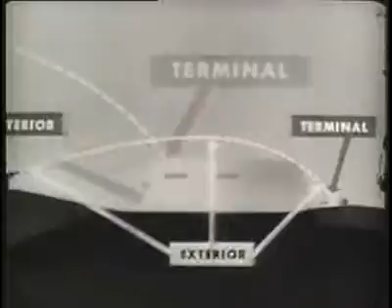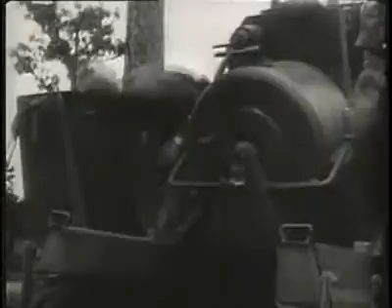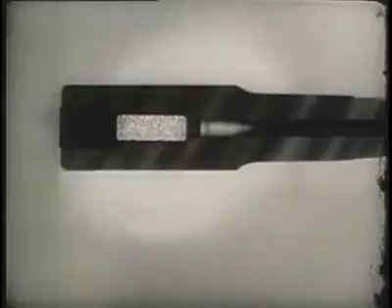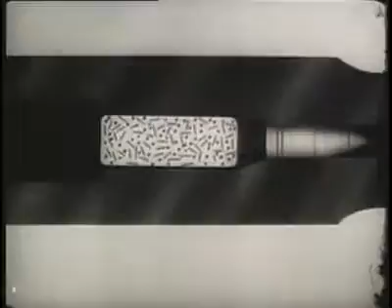Let's look first at the problems involved in launching our ammunition with launching devices that are complex, precision-made instruments, but which operate on a principle as simple as that employed in a pea shooter. When the pressure behind the projectile becomes strong enough, the projectile will move. In any gun, howitzer, mortar, or small arms weapon, the pressure behind the projectile is caused by the burning of the propelling charge or propellant, which forms a tremendous amount of gas in the chamber.

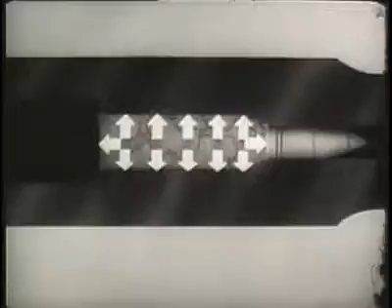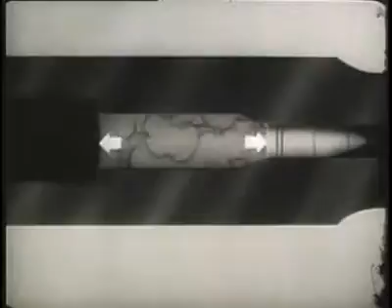This pressure is measured in thousands of pounds per square inch and is exerted equally on all surrounding surfaces, but with different results. The forces represented by the vertical arrows have no effect on the projectile. The pressure or force to the right is against the projectile, the most readily movable of the surrounding surfaces, and sends it out of the bore. At the same time, the force to the left is against the gun, which moves in recoil.

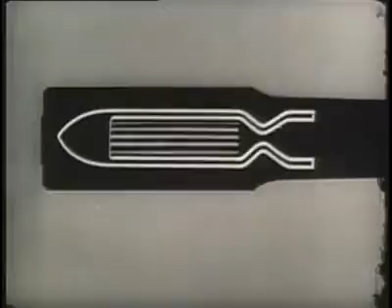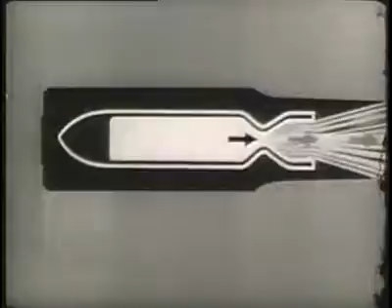By making a few changes in our simplified gun, we can see what happens when we launch a rocket. In effect, the lightweight rocket replaces the gun, and the lightweight gas replaces the projectile. The pressure inside, being equal in all directions, forces the gas out of the chamber at an extremely high velocity. At the same time, the pressure exerts an equal force to the left to propel the rocket.

Military rockets operate on exactly the same principle as the 4th of July variety. The bazooka also uses the rocket principle, while the recoilless rifle is a combination gun and rocket. The propellant used in guns and most rockets is some form of nitrocellulose, commonly called powder. Modern powder is made in grains, the grains taking many different forms to get the various pressures needed in the many different modern weapons.

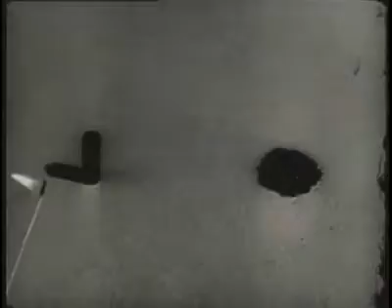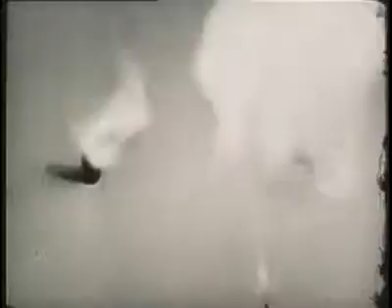Apart from chemical composition, grain size is the most important single factor in determining how rapidly a powder charge will burn. Just as wood shavings will burn more rapidly than the same weight of logs because there's more burning surface exposed, so will small grains burn more rapidly than a large grain of the same weight. When small, rapidly burning grains are used, the propelling effect is that of a sharp, sudden thrust. The effect we get from large grains is that of a sustained push.

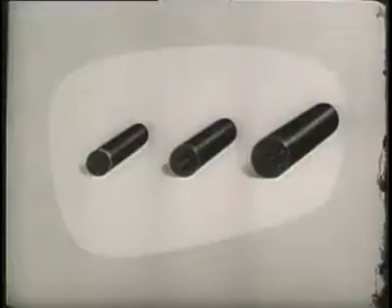But grain design also affects the rate of burning. In general, there are three types of grain: a large grain with 7 holes, a medium-sized grain with 1 hole, and a small solid grain called a digressive grain. When ignited inside a gun, it burns fast and the pressure rises rapidly. As the burning surface decreases, pressure is generated at a slower rate. Here's a graph to show pressure action during burning. The digressive grain produces a very high pressure quickly, but the movement of the projectile tends to let the pressure drop off rapidly.

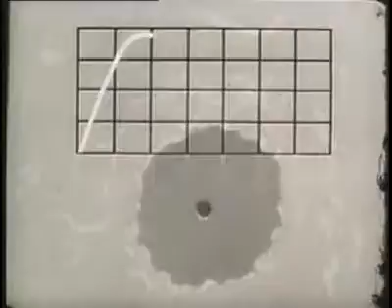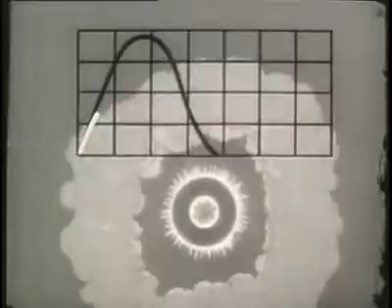The medium-sized grain with a single hole is called a neutral grain. In this form of grain, the burning is slower at first, but the burning surface remains constant during the burning period. Thus, the maximum pressure is not as high as with the digressive type, nor does the pressure drop off as sharply when the projectile moves.

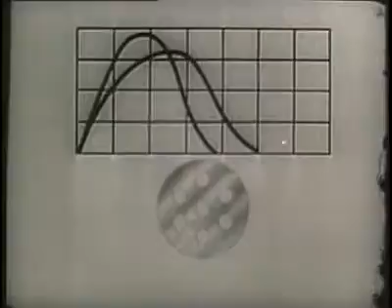The large grain with the 7 lengthwise holes is called a progressive grain. Here, the burning surface increases due to the number of holes. The pressure produced is not as high as with the others, but it falls off even less rapidly as the projectile moves. This grain is preferred in modern high-velocity weapons because it gives the projectile a steady push, produces higher muzzle velocities, and has a lower maximum pressure than is possible with other types of grains. There are many other grain designs, the fast-burning powder sheets for mortars, for example.

Neutral tube-shaped grains for certain types of rockets, as well as a variety of other kinds, each designed to provide the particular burning characteristics best suited to the weapon concerned. Now let's see what kind of pressure action we need for different guns.

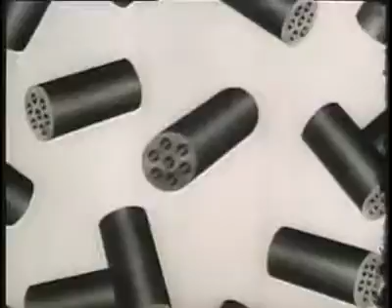When we burn a suitable charge of progressive grains, the pressure is moderate and sustained, sending the projectile out of the bore with a continuous push. This kind of pressure action is just what we need to get high velocity in long-barreled artillery.

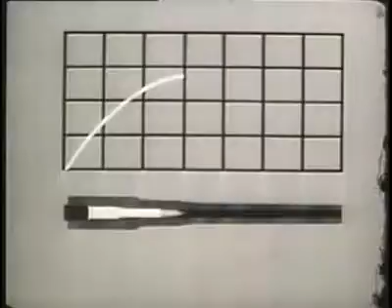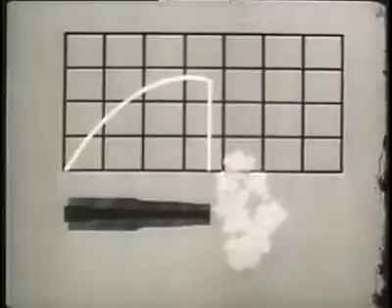But now we'll see what happens when we use the same charge in a short-barreled weapon. There's considerable muzzle flash, and the powder continues burning even after the projectile has left the bore, indicating that energy is being wasted. For a short-barreled weapon, a small digressive grain should be used.

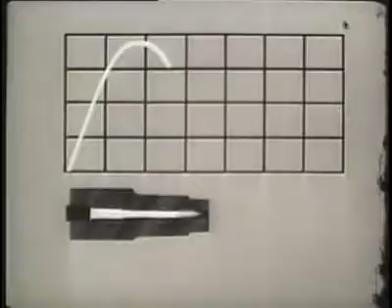This builds up maximum pressure quickly to accelerate the projectile in a short space without undue burning afterward. This kind of pressure action is just what we want for low-velocity weapons, such as mortars or pistols. But if we use digressive grains in a long-barreled gun, there's a chance that the higher maximum pressure produced will blow it up.

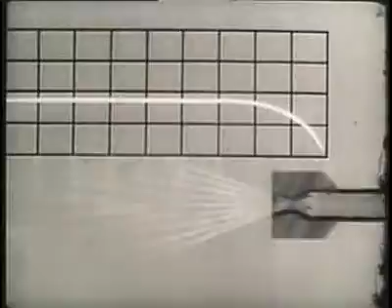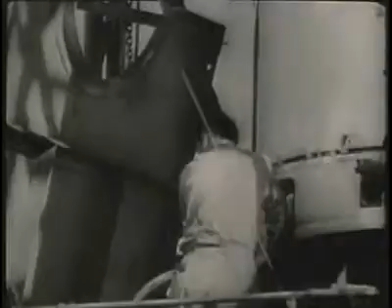For a rocket, we need a low, steady pressure, so we use a special neutral grain. The low pressure will not burst the lightweight rocket, yet give smooth acceleration. For the V-2 and other large rockets, it's better to use certain liquid propellants, mixing them at a constant rate to assure constant burning.

In all cases, the propellant must suit a particular tactical purpose. That means providing the desired velocity with a minimum of smoke, flash, and wear on the weapon. Interior ballistics is a highly complicated science, and what you've seen isn't the whole story by any means. But you do know what an important part pressure plays in launching the projectiles.

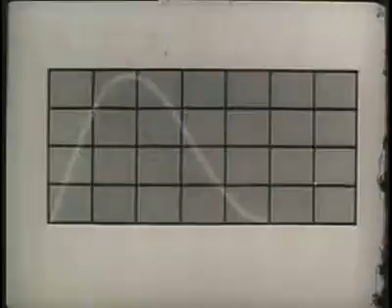You know something of the effects of grain size and design on gas pressure. And you know the relative burning action of the degressive and other types of grain. In other words, you've got a good idea of why and how a projectile leaves home. Now you're ready to consider exterior ballistics. Exterior ballistics is concerned with the behavior of projectiles in flight.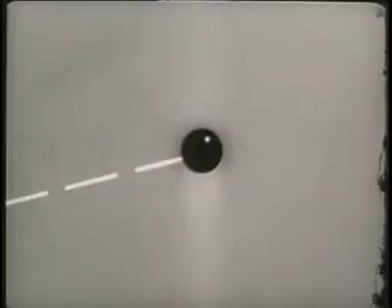If we could fire a cannonball, influenced by no outside forces, it would continue forever in its original direction at its original velocity. If we add the force of gravity, the cannonball follows this sort of path or trajectory. By adding air resistance, we get this result, and the range is shortened still more.

To overcome air resistance and get greater range, we might streamline our cannonball, stretching it into a projectile. But look what happens. Our projectile tumbles, and the range is shorter than ever. We need something to stabilize our projectile in flight. One solution is to equip the projectile with fins. The use of fins solves the problem very effectively for mortars and some types of rockets, and the result is much greater range.

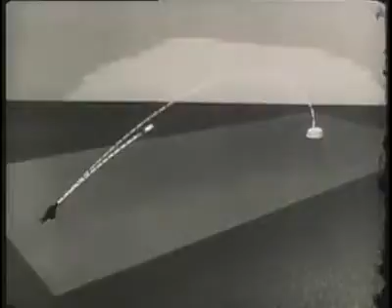Having the projectile spin is another solution to the tumbling problem. This, however, causes the projectile to swerve from a straight course, drifting to one side according to the direction of the spin. That isn't as bad as it might seem because we know it's going to happen and we allow for the drift in aiming.

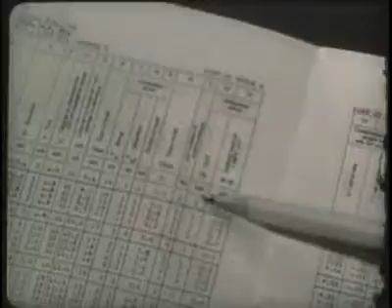To get the required spin, spiral grooves are cut in the bore of the gun and a soft rotating band put around the projectile. The band engages the grooves and the projectile rotates or spins.

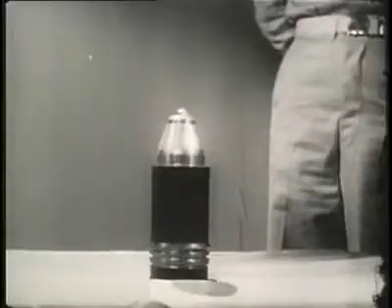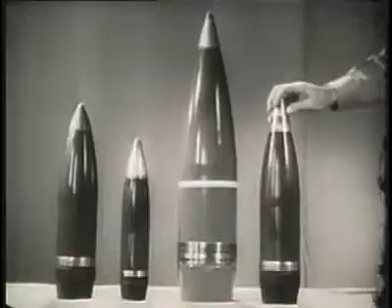Although there are many forces affecting the projectile, the most important to remember are gravity, which pulls the projectile down, and drag due to air resistance, which slows the projectile. There's nothing we can do about gravity, but we can overcome the effects of drag to some extent in the design of our projectiles. For instance, by the streamlined windshield on this one. Boat tailing, another method of streamlining, also helps to reduce drag.

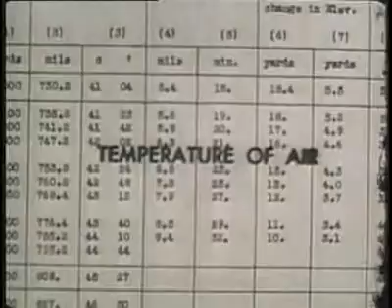For long-range fire, we must consider, in addition to gravity and drag, the effects of varying density of the air, the temperature of the air, winds over the trajectory, and the rotation of the Earth. The basic problem of the exterior ballistician is always the same: to study, improve, and predict the behavior of projectiles or missiles in flight.

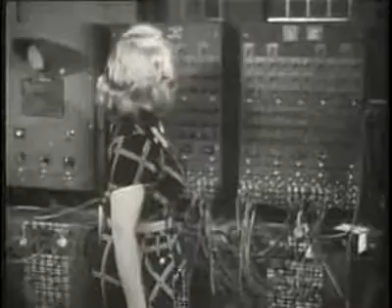Solution of the problem involves the knowledge of many complex forces, the application of many scientific principles, the use of many ingenious lightning-fast computing machines. The ultimate purpose of all this is to design projectiles and compute firing tables, both of such accuracy that our combat units get the maximum number of direct hits.

And that is where terminal ballistics comes in. In terminal ballistics, we are concerned with what happens at the target, with the problem of getting the type of action we want for each different kind of target by the most economical, practicable means.

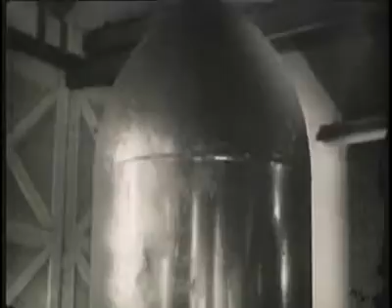Our projectiles, bombs, warheads, mines, grenades, and so forth are designed to provide different basic effects. By using a large amount of high explosive, we get an effect called blast, making use of violently expanding gases under tremendous pressure. Blast shatters brittle masonry or concrete. It will also twist and tear the metal construction of buildings and vehicles.

If penetration is the important thing, we can use a high-velocity projectile with a tough nose and little or no explosive. This sort of projectile will penetrate wood, stone, and up to several inches of steel.

By using certain proportions between the weight of the explosive and the thickness of the projectile, we can get fragmentation. Our projectile or bomb breaks up into hundreds of flying fragments. They penetrate like bullets, but leave more jagged, irregular holes. Fragments from bursting shells can do severe damage to personnel and to light structures, such as this plane.

Finally, by using incendiary projectiles, or bomb clusters, we can start fires to cause great damage in a city, or in a structure or area where large quantities of supplies are stored. Generally speaking, each type of action will be effective against one particular type of target, but a combination will be even more effective. So our projectiles and bombs are usually designed with such a combination in mind.

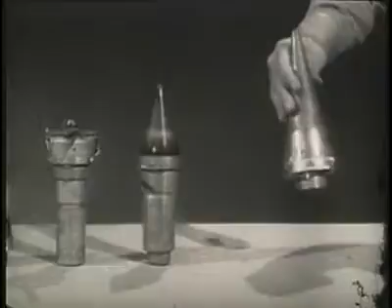Now, to time or control the action of the projectile at the target, we use different types of fuses. Some of our fuses act on impact, either instantly or after a short delay. Time fuses act a set time after launching. Proximity fuses when they get near the target.

Fuse location is also important. In certain cases, we'll get the best results by placing the fuse at the front end of the projectile. In other cases, it works better in the base. Bomb fuses are sometimes placed on the side, and in the larger bombs, more than one fuse is necessary. The fuse type and fuse location determine to a large extent the type of action we get at the target.

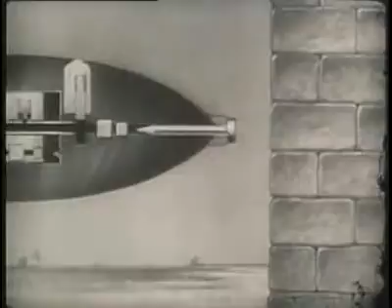Now let's consider a typical application of these fundamentals of terminal ballistics in dealing with an enemy plane. Fragmentation is the effect we want. Besides endangering personnel in the plane, flying fragments can wreck the engines, weaken structural members, and may penetrate the fuel tanks, generating enough heat to start a fire. The shell to do this particular job must carry enough high explosive to shatter the shell case and produce high-velocity fragments of the most effective size.

Now, what about the fuse for this job? We might use a time fuse, but our best bet will be a fuse of the proximity type, one that will go off automatically when it's near the target.

If we're dealing with an armored target or one of reinforced concrete, the first problem is to penetrate. So we need a tough-nosed, armor-piercing projectile that will be strong enough to withstand impact, one that will penetrate without breaking up. Fragmentation is effective after penetration, so a small explosive charge is added. In this case, the fuse must be placed in the base of the projectile and should have a short delay action after impact. The combined effect of penetration and fragmentation gets both the pillbox and its occupant.

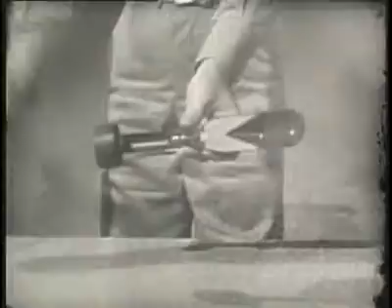If we don't have high velocity, we can get penetration by sharply focusing the force of the explosion. This is done by the proper shaping of the high explosive charge. It's up to the terminal ballistician to determine from his experience and his experiments which combination of effects will be the most destructive for each kind of target.

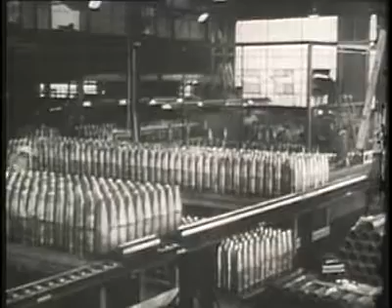And there are other elements to be considered by the terminal ballistician. In all cases, the ammunition he prescribes must be suitable for mass production. It must also be safe to handle, transport, and store. Technically, it must present no impossible problems in any phase of ballistics.

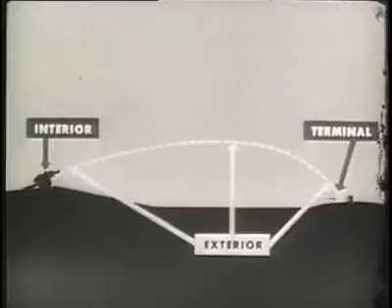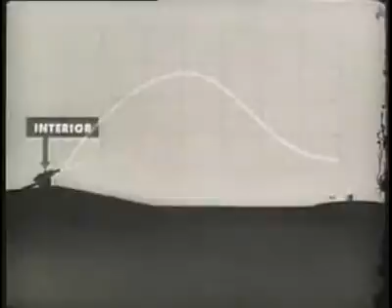The first concern of the interior ballistician is the safe and successful launching of the ammunition. The important point to the exterior ballistician is predicting its behavior in flight. By means of firing tables, this information is passed on to the appropriate using units. They, in turn, must launch the ammunition with full confidence that the terminal ballistician has provided it with the proper destructive potentialities at the target.